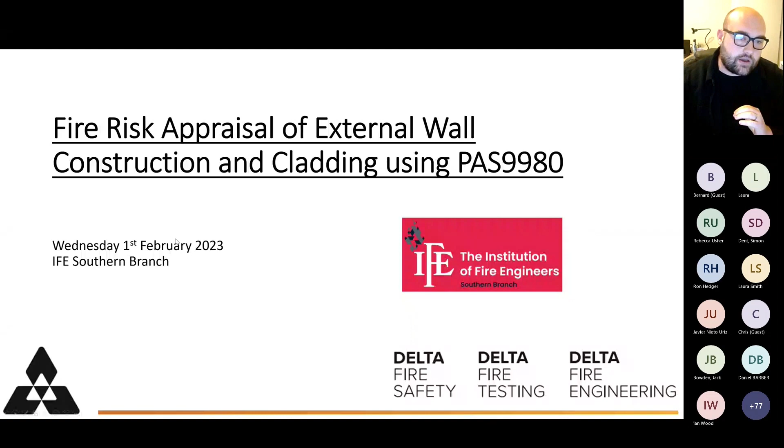I'll briefly introduce who I am. I was looking at some of the names coming in, lots of us know each other, but for anyone that doesn't, my name is Joe. So I wear two hats. I'm lecturer in fire engineering at the University of Central Lancashire. I specialise in delivering all of the technical modules related to industry. And I saw there's lots of students dialed in, so good to see you guys. Outside of that, I'm also director of Delta Fire Engineering and our trio of companies: Delta Fire Engineering, Delta Fire Safety and Delta Fire Testing. I run those three firms. So very busy. I do lots of lecturing, lots of engagement like this, and I'm also a practicing engineer. So everything that I teach, I am practicing what I preach.

I work out in industry, working on external walls quite a lot at the moment through our fire safety and fire testing parts of the business.

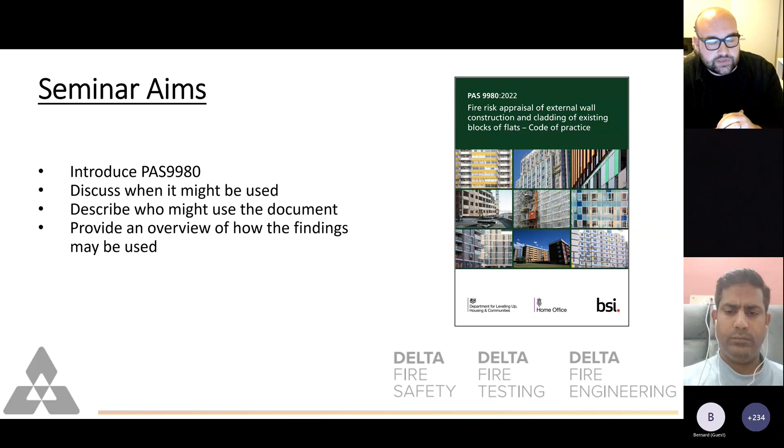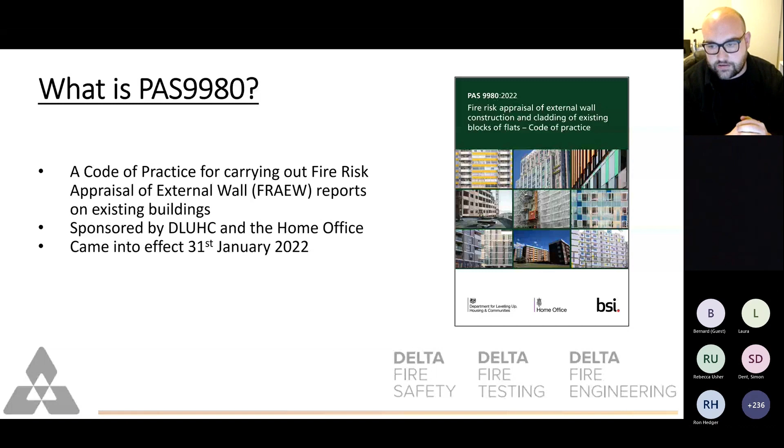So I'll start by answering the question, what is PAS9980? The document, as we see on screen there, is free to obtain from the British Standards Institute. You've got to put an email in, but you get a free copy. It's a code of practice, and it gives a methodology to undertake what we call an FRAEW, a fire risk appraisal of external walls, and it applies only to existing buildings. I'll go on to talk about why that is. It is quite a comprehensive document, a couple hundred pages. I took the opportunity to read it cover to cover in putting this presentation together, which I usually do. My presentation before was the post-war building studies, and I read all 500 pages, so this one wasn't quite as intense. There's loads of good information in there about the background and then a methodology to follow.

It was sponsored by the Department for Levelling Up, Housing and Communities and the Home Office, and it came into effect on the 31st of January last year. So happy birthday, PAS9980, for yesterday. We've been using it in industry for about a year. Of course, it was out for draft for comment just before that, but a year of it being really stress tested out there in industry for us guys using it.

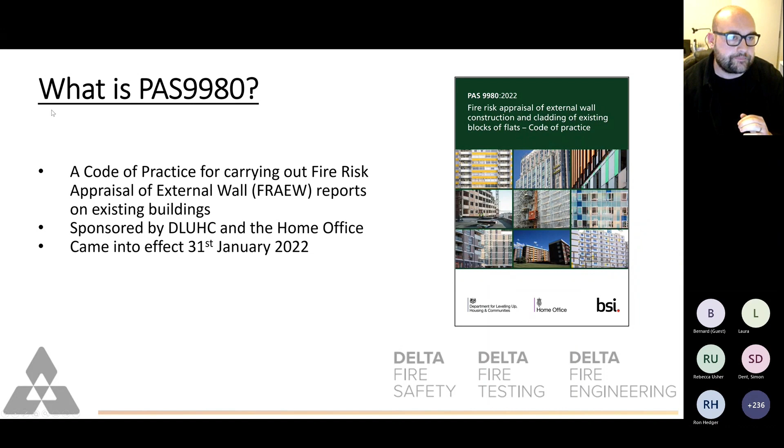In going through it, I was trying to write a section about the background, and I couldn't do a better job than the introduction in the document itself. This is section 0.1 of PAS9980, and it sets the precedent for why it exists as a document, and I think it does it rather well. Whenever I quote something from someone else's work, I put it in italics, and I put in bold the point that I think is most pertinent to what we're talking about.

Whenever we're talking about external walls, we all know in the back of our minds we are in the shadow of the Grenfell Tower fire, and that's where this document comes from. In the background, it alludes to this, talking about the loss of life at Grenfell Tower and the prevalence of external wall work that's come off the back of that.

The loss of 72 lives in the tragic fire at Grenfell Tower in June 2017 brought the risk of fire spread over external walls into sharp focus. I'm going to skip to the bit I put in bold: it is now known how this fire, which was unprecedented in the UK, occurred and gave rise to such a tragic outcome. Much is being done to make sure that such an event never happens again. That's the precedent behind us doing work on external walls, particularly when we're looking at existing buildings.

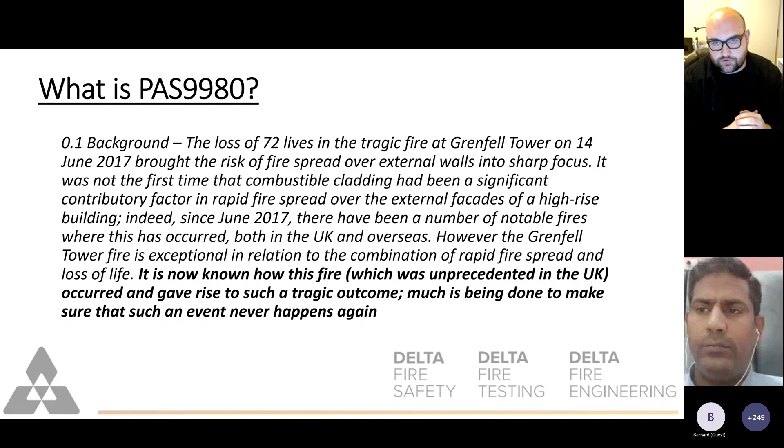And that's a really important point. Where we have existing buildings with potential fire safety issues, particularly related to the external wall, we look for methodologies like this so we can carry out risk-based assessments. I thought it captured it rather well, where it said much is being done to make sure such an event never happens again. Certainly when I'm working and teaching, that's what drives me on when we're doing this work, and I think lots of my colleagues share that feeling. So it's on this basis that we look into these methodologies for external wall remediations or assessments.

Any of you that have been in a lecture with me before, some of my current and former students will know I always try to tell a bit of a story and get in some relevance to what we're going to talk about. I want to do that by talking about external walls more generally and the complexities involved. When we write fire strategies and look at solutions - compartmentation, means of escape, firefighting intervention - we're thinking internal to the building, about the complexities of those individual elements.

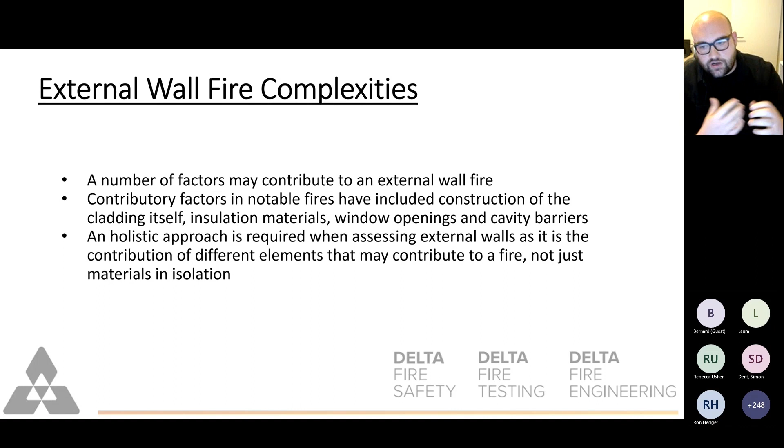When we look at external wall design for buildings, particularly high rise or where we've got residential occupants, there are a number of factors that can come into that external wall fire. It's not simply a case of one material in that external wall, or just the orientation of one element. We need a holistic approach - we need to think about all the components of that external wall and how they might behave together in the event of a fire.

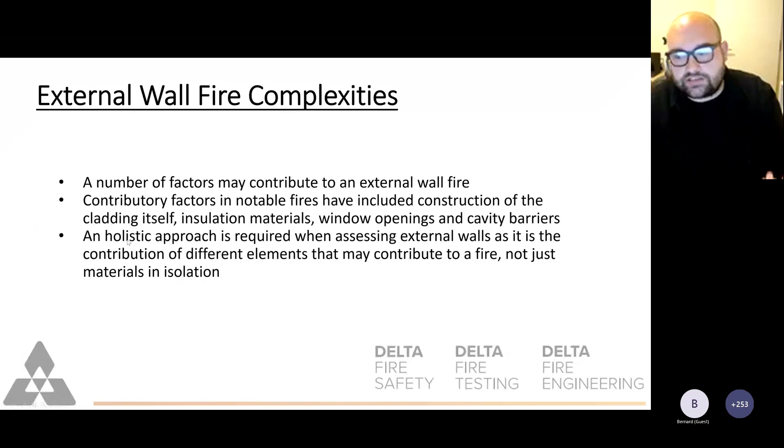When we look at notable fires - and this is a slightly longer presentation, I've taken out some slides because I'm limited on time this evening - we can look at case studies and some of the contributory factors. It's not always just one element that fails; it's not just the cladding or the insulation. It can be window openings, cavity barriers, the specification of materials and the way they're installed. There are an awful lot of complexities to do with external walls, which is why the key word here is the holistic approach. We have to look at lots of different things and adopt quite a lot of principles in carrying out these assessments.

We expect there may be some spread to the compartment directly above, but what we look to design out, and investigate when it occurs, is a fire that's able to either self-propagate or cause secondary ignition further up or more laterally from the compartment of fire origin, and crucially, spread back into the building in other compartments. If we go to all the effort of having an internal compartmentation strategy, like we do in flats, with 60-minute compartmentation between apartments, fire doors, 30 minutes, all these provisions internally, it can be detrimental to that strategy if we have external fire spread.

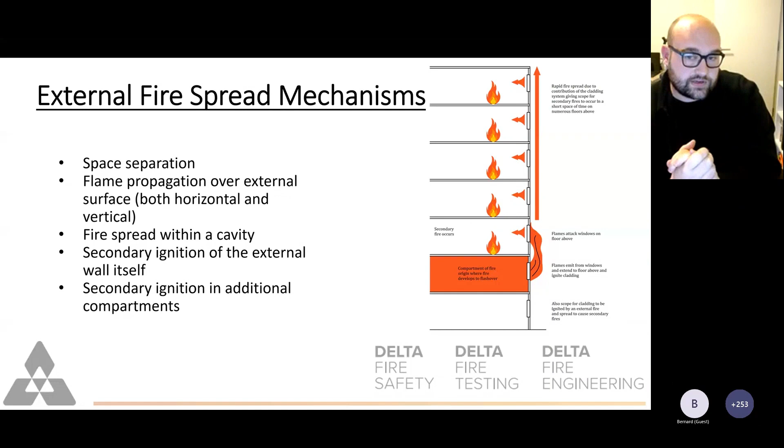This is a kind of entry-level fire dynamics. I do actually teach these slides on the course, on the degree. This is final year undergraduate. I usually at the beginning say where it sits, so it's about level 6, final year undergrad. Some of you guys have had these slides recently.

So let's look at the legal requirements. So what are our actual requirements? And this leads us to where we might adopt this methodology in PAS9980 on a real project.

So the Building Amendment Regulations 2018, we recall coming in post-Grenfell, and it imposed requirements on buildings that were designed and built thereafter. It limited the combustible nature of materials used in external walls.

In 2005, though, of course, we have our Regulatory Reform Fire Safety Order. So under the Fire Safety Order, we have a requirement under Article 9 to carry out a fire risk assessment of premises. And that was amended in 2021.

So the Fire Safety Act brings in, or confirms, that Article 9 applies to structure, external wall and flat entrance doors. Where traditionally - well, tradition is definitely the wrong word, it's not tradition, but where historically people may not have considered parts of the building under a high-rise residential, or even just a residential, fire risk assessment, in 2021 we get this legal obligation.

It's confirming that Article 9 applies to cladding. So we have a legal requirement to look at the cladding on the outside of a building, even if it's not cladding, just the external wall itself, when we're carrying out a fire risk assessment under the Regulatory Reform Fire Safety Order. And just to bring the presentation up to date, of course, we now have the Fire Safety England regs that came in just last week, in fact, wasn't it?

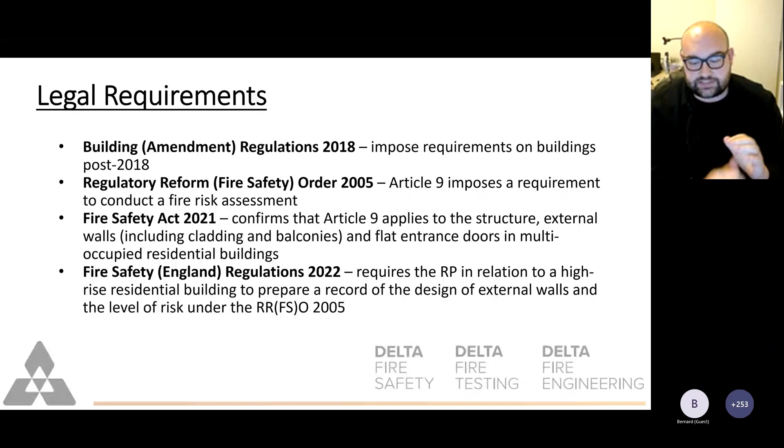So it leads us to this idea. So how do we go about doing that? In a normal fire risk assessment, if I was doing one of a residential premises, I'd be looking at PAS 79 and I'd be looking at some of the guides, the Home Office guides, and drawing on some knowledge I've got of residential buildings. But within those things, there isn't necessarily guidance surrounding external walls. So we look for a specific process, a methodology we can use.

And that is the FRAEW, the Fire Risk Appraisal of External Walls. PAS9980 was brought in to provide a methodology on which to do that. So it provides a methodology to do the risk-based review of the external walls. And perhaps that should be in bold, risk-based, because it is a risk-based approach, as is a risk assessment. It doesn't give an absolute level of safety. It's not a yes or no.

It's not an absolute prediction of the way that fire may occur and grow or spread. It's a risk-based approach, so it can be used by specialists to meet the legal duty to risk assess the external walls, which we just discussed in the previous slide, now a duty under Article 9 of the Fire Safety Order. This is a direct quote, and I very much agree with it.

No code of practice can ever provide guidance for all possible circumstances. There is a reliance in using any code of practice on the person that's applying it. It won't give all the answers in there, and it won't cater for all different scenarios. As we've said previously, external walls particularly are very complex things. There's not just the specification of materials, but the way in which they're installed, and the way different areas of external walls deteriorate at different rates over time, and how that may impact the fire performance.

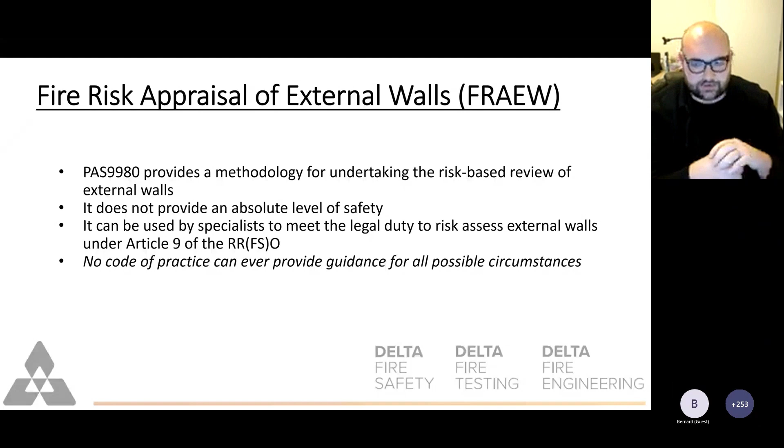I put it in bold just because I really agree with that statement, that it's not an absolute methodology you can follow start to finish and get an answer. There is quite a lot of reliance on the person that's doing it, and we go on to discuss competence in a couple of slides' time.

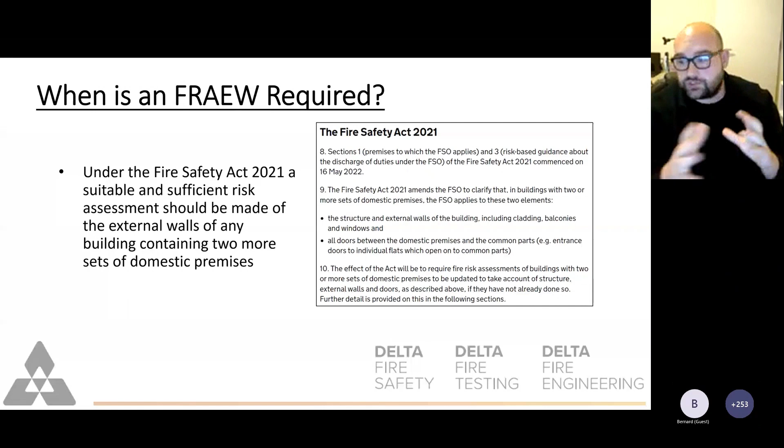This is just a snippet from the Fire Safety Act that tells us a suitable and sufficient risk assessment should be made of the external walls of any building containing two or more sets of domestic premises. Just for reference, that one I've already discussed.

It is a pertinent point though, because the question I often get is, when is one of these assessments required? I sometimes like to look at the question differently and ask, when is it not required? Let's try to define a time at which point we don't need to do it. So we know if we're carrying out a fire risk assessment, we have to consider the external walls.

If we look at that external wall and it is self-evident to the fire risk assessor that there is either no combustible material, or for some other reason that dictates the risk is sufficient, it feeds into the wider building fire risk assessment, that a more detailed analysis is not required. So, for example, if the external wall can be readily confirmed as being a traditional masonry construction...

I just start getting a lot of feedback. Is somebody on there? Can someone just mute their microphone? That sounds better, actually. Thank you.

So if the assessor can determine that the external wall is built of traditional masonry construction, there's nothing combustible present. If the age of the building -- these come from PAS9980 -- predates the mid-1960s, before the prevalence of combustible material on outside exterior walls and cladding systems, and there have been no amendments made, the assessor may make that assessment. This individual may say we don't feel there's a requirement for a more specialist, more advanced risk assessment technique of the external wall.

If it can be confirmed that there are no combustible components, if there's an O&M manual, there's been an assessment, there's been a previous fire engineered strategy undertaken reviewing the external walls -- for example, a competent person has looked at relevant test data and assessment as part of remediation or as part of a retrospective fire strategy -- then there's a case to say there's no need to carry out a dedicated, specific fire risk appraisal of the external wall.

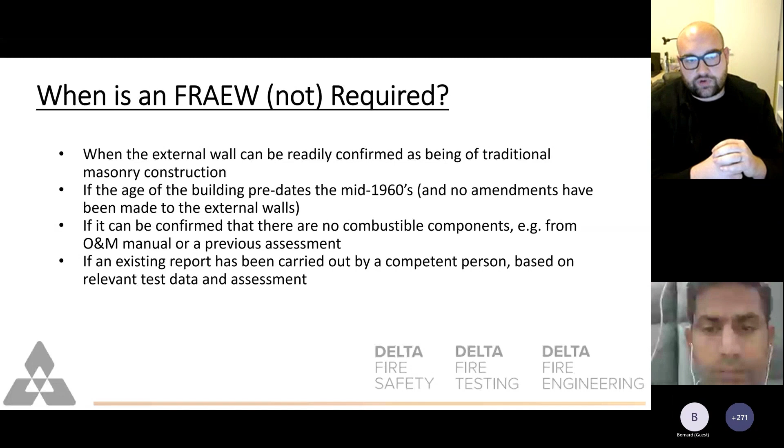Under the duties of Article 9 of the Regulatory Reform Fire Safety Order, that individual may say the risk is sufficient, it doesn't impose undue risk on the building, and that finding can just be included in the communal residential fire risk assessment.

Again, in italics, we know this is a quote from PAS9980, and it's one that I'd like to highlight. It says it is therefore expected that fire risk assessors will be judicious in their recommendations for an FRAEW by a specialist within the action plan of an FRA. Unnecessary recommendations from fire risk assessors would make significant demand on the scarce resources available, thereby diverting attention from buildings in which the public might be at serious risk, etc.

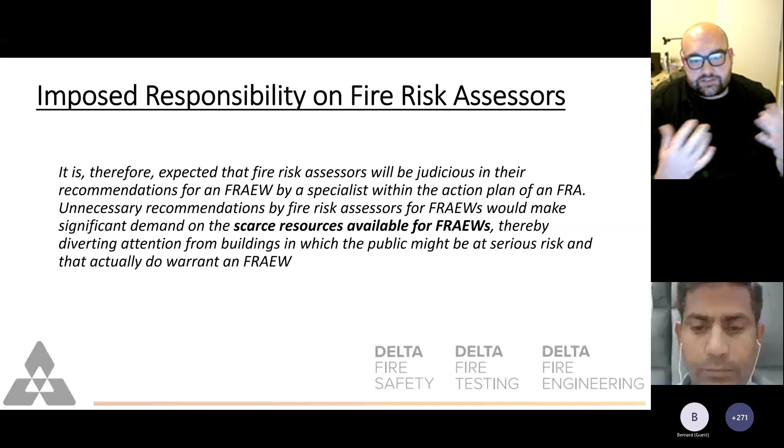I've put a bit in bold there because we're going to come on to talk about scarce resources available. There is a very specific reason that there are scarce resources available, and I present the fact that it's because it's very difficult work to do. It requires very specialist knowledge, and it brings us to the concept of competency, which is a very large section in PAS9980 -- something I spend a lot of time teaching.

So people who come and do the university course, the undergrad or postgrad, will at some point, if you haven't already, have a lecture from me about ethics, professional ethics and competencies, and being able to identify one's own limitations and what we're good at.

The undertaking of external wall fire risk appraisal requires a lot of specialist skills, because in doing that assessment you need knowledge of lots of different areas. So I've listed some of these out. These are some of the ones that I came up with.

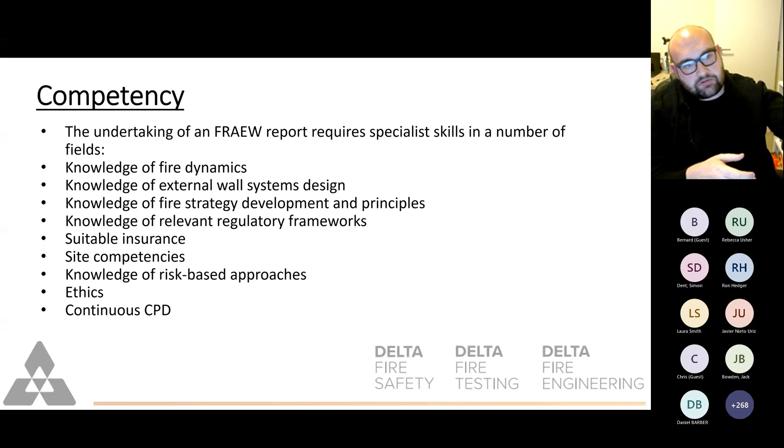Knowledge of fire dynamics. When we're looking at this particular assessment methodology, we have to make some predictions about how a fire might spread on the outside of a building, or what the contribution of materials might be. There's some technical stuff to look into about calorific values of materials, so there is some knowledge required of fire dynamics, but also knowledge of external wall systems design.

I think there has to be some specialization in how an external wall is specified, how the fire strategy is written, and also the construction methods. Being able to look at something on the outside of a building and identify the type of cladding that's there, thinking about what insulation is likely to be behind there, thinking about how it's been installed. That's a very important competency for people carrying out this work.

As is knowledge of fire strategies, fire strategy development and principles. A big part of doing these - and we'll come on to site-based works - we have to identify, we have to look for instances where we have cavity barriers. Without a bit of knowledge about fire strategies and thinking about where internal compartmentation would be, you can't target where to look for those areas, how to do your forensic investigation, your intrusive survey of the external wall.

So some knowledge of fire strategy, not just for external walls but also internal, is very important in doing this kind of work. As is knowledge of relevant regulatory frameworks. I did a very long lecture yesterday about fire safety law - I presume no one's turned up that was in that lecture yesterday, I think most of them have left the course because it was a very long lecture. But I've been looking at this quite a lot. How important is it that we understand in professional industry what the regulatory frameworks are? I think it's very important. I teach a whole module about law for that exact purpose.

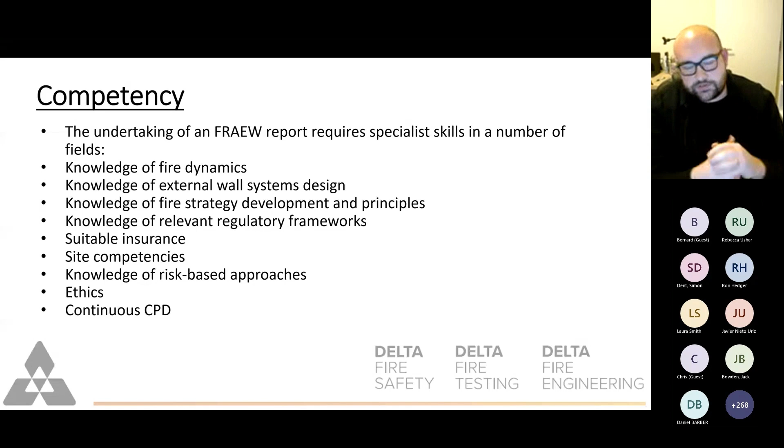We bang the drum continuously at the IFE and through various channels, the university as well, that continuous CPD is important, keeping the CPD log and making sure that everybody's trying to keep at the forefront of what's going on. Continuous CPD like this is very important, particularly in a field where there's lots of research going on.

I can talk from UCLAN's perspective. We're doing an awful lot of research into external walls at the moment. I think my colleague Eleni is on the call. She sent me a very good email this morning about some upcoming research, some PhD students we've got. So lots of good stuff going on. In an industry that has lots of research going on, we all need to keep abreast of what that is.

We should be reading papers, attending conferences, attending CPDs as we're doing tonight. Back onto the competency thing, that's just a list of things that I feel are quite important for individuals working in this field. We can see that it's quite broad. It doesn't preclude disciplines outside fire engineering being involved.

I actually encourage it. I have colleagues that I work with who are architects, and we have people come and work in Delta when we're doing this sort of work who are facade engineers. I think that's very important. So it doesn't preclude people outside of fire engineering and risk assessment being involved, but it also doesn't infer that fire engineers are automatically qualified.

It's a specialist area. I was doing a careers talk last week to a bunch of students, and I was talking about how fire engineering itself isn't necessarily, it is a career, of course, it's a very good one, but it's not the career. There are specialisms within there.

I've spent the last 3 years doing loads of CFD. So that kind of became my specialism for a little while, because I teach that and lots of my research is CFD based. I've come over to this field a little bit and find myself specialising in it. So as a fire engineer, having completed a degree and got some qualifications and letters after your name, it doesn't necessarily mean that those persons are automatically qualified. It doesn't mean we have to be a fire engineer to do this work.

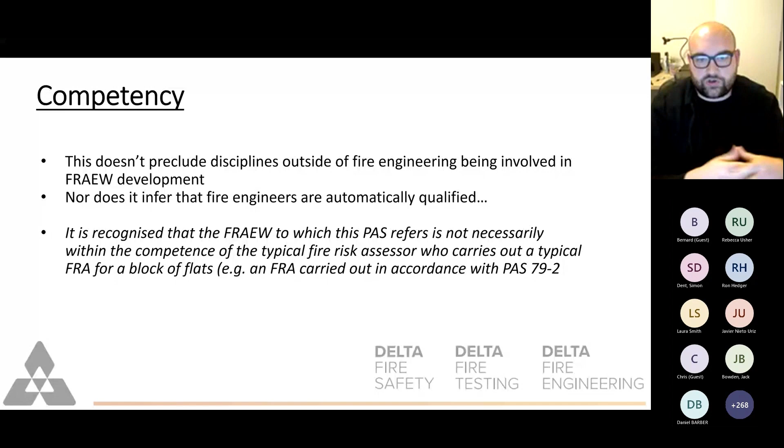It recommends a specialist come in and do this sort of work, or somebody that is upskilled sufficiently to be able to work in this arena. It is, in some cases, not always, but in some cases, a lot more technical than a fire risk assessment of a typical residential block of flats.

So an area just in PAS9980, I'll keep referring back and forth to the document, and we'll get to the methodology and things in just a second. But Annex H, I think, has quite a good section that describes this probably far better than I just have, about the expected skill sets of people involved in external wall assessment.

It breaks it down into 3 sections of roles, deliverables that we might have during one of these PAS9980 assessments, a fire risk appraisal of external wall. First of all, the information gathering. That could be the individuals going to site to look at the existing construction, or reviewing the fire strategy and the drawings and the test data.

It suggests for that individual they should be surveyors or building professionals such as an architect or facade engineer. PAS9980 has 2 different types of assessment, the basic level and the in-depth - we'll talk about those in a moment. For the basic level assessment, it recommends a fully qualified member of a relevant professional body, and for the in-depth technical fire engineering assessment, a chartered engineer.

When you look through Annex H, which I encourage people to do, it gives the typical professional recognition and the skill set as well. So the example on screen there for the information gathering and site survey: able to undertake document study, conduct on-site verification, has knowledge of materials, components and systems used in external wall construction. I certainly agree with all of those.

It gives the expected skill set for anybody involved in the different stages, because perhaps we've got different people doing different roles within this. We may get to a stage where we've got somebody out on site doing the information gathering. We've got a building surveyor. We've got somebody who's involved in architecture or facades.

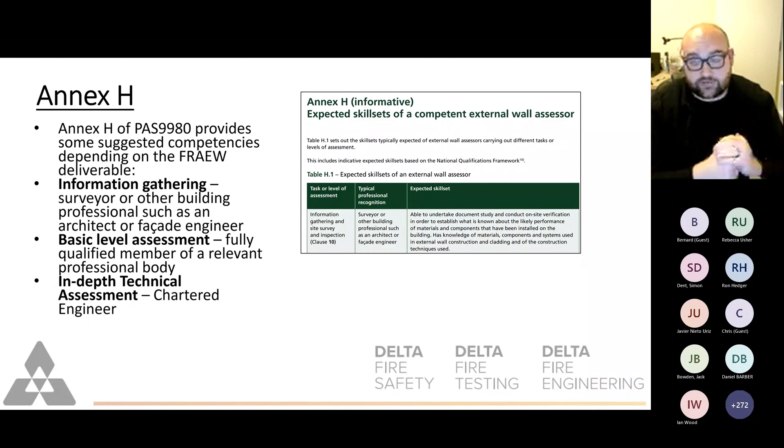That information goes to fire risk assessors or fire engineers to do the basic level assessment, and it's determined that more work is needed, so the in-depth work comes in - a specialist fire engineer that works only in this field. So at different stages in the assessment, we might have different people get involved who have a requirement for different skill sets, different competencies.

So the objective of PAS9980, then. We've kind of painted the picture there of why it is that we're looking at external walls specifically, on the basis of some issues that are involved in fires that have occurred and historic issues uncovered as part of that investigation. There is a requirement now, a legal requirement, to look at the external wall, do an appraisal of the external wall system as part of a fire risk assessment. It's been confirmed that that is a requirement of Article 9 of the Fire Safety Order.

And we know that it's very specialist. It's very difficult to do that. So PAS9980 was introduced as an opportunity, a way of giving a methodology to follow, to provide competent fire engineers. This should be in italics, actually, because it's a direct quote: competent fire engineers and other competent building professionals with a methodology for appraising and assessing the scope and risk from fire spread via external wall construction and cladding.

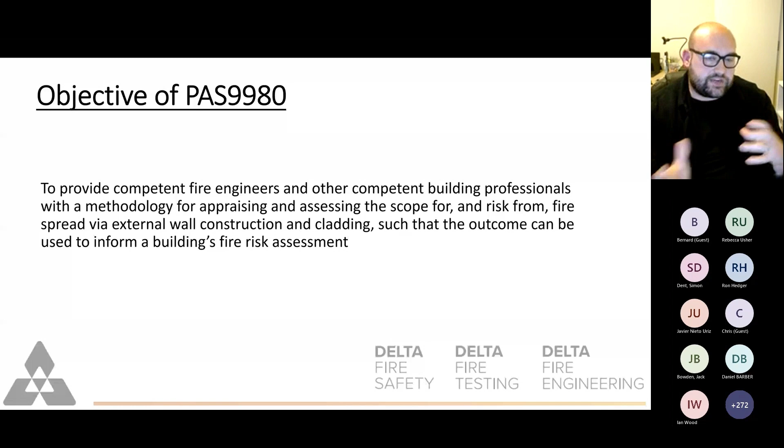And it's such that the outcome can be used to inform a building's fire risk assessment. Back to that idea of holistic. This will feed into the overall fire risk appraisal for the building that's occurring.

So a while ago, I wrote a paper called Does Size Really Matter? And it compared the risk in buildings of different heights. Don't let the terrible pun throw you off. It was a detailed piece of work, and it was talking about threshold heights in buildings. It's kicking around somewhere. Somebody sent it to me recently. It was published in a journal somewhere, I can't remember now. And in the paper, I discussed the idea that risk isn't necessarily directly proportionate to the height of the building.

I presented in there that if we consider the risk in a 2-story dementia care home, would we argue that the risk in a 3-story student residential is higher? And then we get into defining risk and talking about, if we consider the occupants, it's not necessarily just the height of the building. Now, of course, there are increased risks, consequences and severity and likelihood in a high-rise building, but it's not the only factor.

In actual fact, we can have really high-risk premises that are on the ground floor. We could have a ground floor hospital, and the risk to the occupants is greater than somebody who is on, arguably, it's the case I make in the paper, the 10th floor of a high-rise residential building that's sprinklered and has all sorts of things in place. So does size really matter? Well, not when we're adopting this methodology.

PAS9980 isn't one of these guidance documents that says it applies only above a certain threshold. It can be applied to a building of any height. It's very explicit in the introduction for that, because if we're doing a fire risk assessment, we could be looking at a building that has 2 or more dwellings. It could be 2-story, 3 stories, and we would still be obliged to carry out a review of the external wall system.

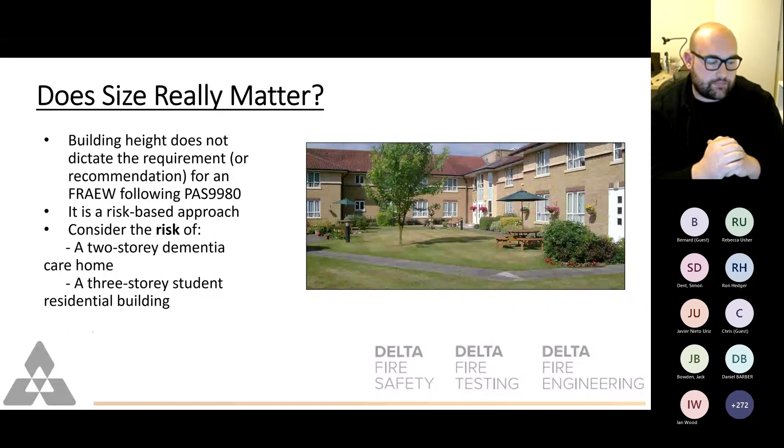So it's an important point to note, and something that people often say: I've never reviewed this document, Joe, because I don't work on high rise. I don't work above 18 meters, something like that. It's still a methodology that could be useful when we're just looking at fire risk appraisal of external walls of any height.

So another important point that I've got in bold there is that it's concerned with life safety only. And again, very explicit in the document, something that we should be aware of. If we are carrying out an appraisal of the external wall, and we are looking at using this methodology, carrying out any assessment, we are only looking at the life safety of the occupants.

It's not intended for property protection, much like if we follow the minimum requirements of the building regulations and we follow the minimum guidance of something like Approved Document B, we're designing for life safety only. That's really explicit in ADB and the building regulations. Any enhancement above that for property protection will further enhance the life safety, you could infer, but if we do the minimum assessment, we're only concerned with life safety, and quite right too. That should be our primary focus when we're looking at this. Go back to my very first slide.

The purpose of doing this work is to prevent a fire like the one we had in 2017 occurring again. So we are looking at the safety of the occupants of the building, not necessarily the structure and the insurer's requirements, for example. Again, the methodology can be applied to a building of any height. And the purpose, the intention of the PAS9980 assessment, is to inform the overall building fire risk assessment and to help make a decision on whether remediation or other mitigation measures are necessary.

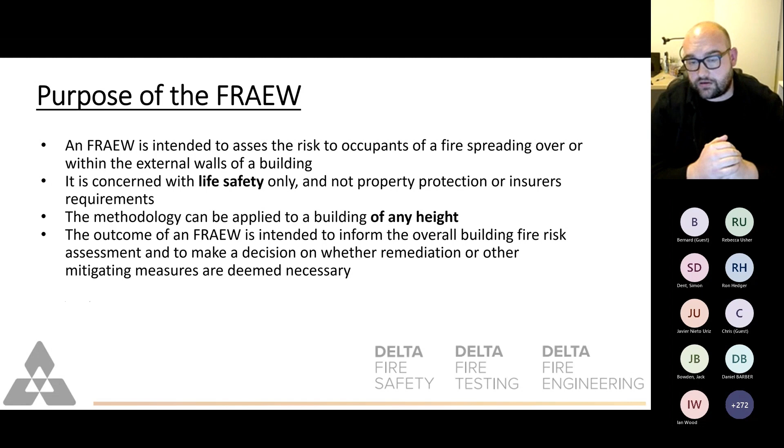If you Google PAS9980 and you get the automatic suggestions from Google, it gives the most searched questions. The most searched question is not how do you pronounce PAS9980, it's does it replace EWS1? And I've been asked this an awful lot. If I've got to be commercial for a moment, with a fee proposal out with the client for an EWS1 form, more times than I care to count, but certainly half a dozen, they phoned me and said, do we not need that anymore? Do we now need this instead? Is this a replacement? And the answer is no.

The EWS1 form is produced by RICS and is a valuation tool used for mortgage lenders. PAS9980 doesn't replace that in any way. Certainly doing EWS1 forms prior to PAS9980 coming out, there was always a requirement, or at least I see it as a requirement, that when signing off an EWS1 form, there should be some risk assessment behind it. There should be some way of justifying why that assessor has given it this rating, A1, B1, whatever it might be.

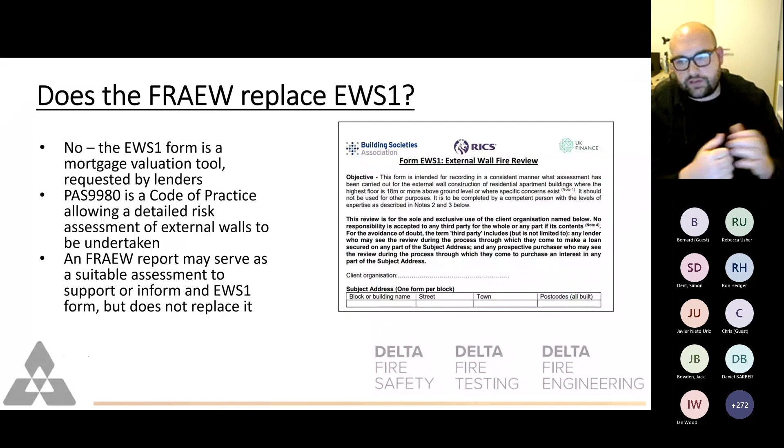PAS9980 can be used, it's an available methodology, should I say, in order to do that. So you can carry out a PAS9980 assessment, a fire risk appraisal of the external wall following the guidance of the PAS9980 Code of Practice. That can be the supplementary report that goes behind the EWS1 that justifies how we've made those decisions, but it's not a replacement. It's useful to get that one in because I get asked that question quite a lot. So it can support and inform the EWS1 form decision, but it doesn't replace it.

So to go on to the actual methodology, as I say, this isn't a session where we learn how to do the methodology start to finish. It's not a training session, but let's go through the methodology. As presented in PAS9980, it's a 5-step approach. The first thing to do is a very logical one: confirm that the full fire risk appraisal of the external wall is required. It could be that as we start to look at the documents, we realise there has been a previous full-scale test, BS 8414, and a BR135 assessment has been done. That'll lead us to say we don't need to go do intrusive works. We've had some work done previously.

Once we've confirmed that we want to do an appraisal of the external wall, it's then information gathering. When I do this kind of work, as with anything retrospective, I look to get as much information as I can. So I'm looking for drawings, as-built designs, the approval at the time, the fire strategy, previous fire risk assessment, any test data. If there has been a BR135 assessment, I'd be looking to review that. Having got that, we start to look into what we call factors, which we'll come on to in the next slide. We're thinking about how significant these factors are in altering the risk within the building. We consider each of those in step 4, and then we review that final risk factor. Steps 3, 4, and 5 is what I'll do next.

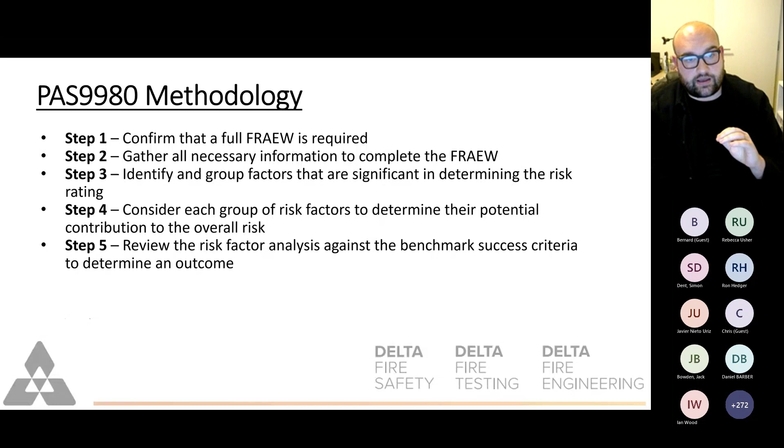But the thing to bear in mind is, first of all, we have a desktop exercise. We confirm that we're going to carry out a fire risk appraisal of the external wall, then we gather as much information as we can. We go through that and start to draw some conclusions. That will help inform the site works. As I mentioned earlier, cavity barriers: if we get a fire strategy for the building and we see it's cluster accommodation, and only 60 minutes is provided around a cluster, then we know we don't want to pull off a panel at the junction between 2 bedrooms that aren't fire rated, because we wouldn't anticipate a cavity barrier to be there. So from this, we start to form what we're going to do in stages 3, 4, and 5. So document review, I've just been through these by accident.

So building plans are obviously very important. Details of the external wall system, where these are available, specification. Fire strategy for the building, one of the first things that I pick up and read if it's available to me. Any technical literature from a manufacturer, it's always helpful to have. I look for that, hopefully, in an appendix to the fire strategy. I know certainly if I'm writing a fire strategy and I've got that technical data, I put it in as part of the information under the golden thread now.

Fire performance of any test results. So if there has been an 8414 test or even small bench scale tests of the components, I'd be reviewing those. And the laboratory report, any classification documentation as well that's available for the system on the building.

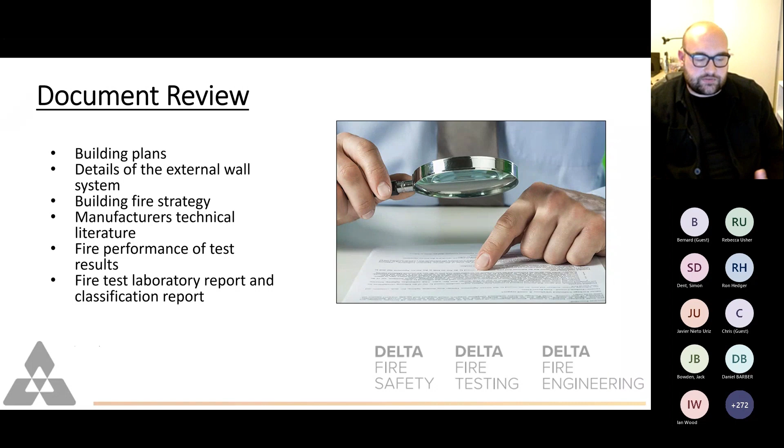We then have to go and carry out some form of site intrusive inspection. Now, the reason for this is quite pertinent. It's because a document that we review that says this is the intended design of the building is exactly what I've just said. It's intended construction. What we have to do is do some form of validation. So go to site and confirm that what has been designed has actually been installed.

I say this with caution, because I disproportionately see buildings that have issues with them. But in the vast majority of cases where I see something on plan, I go and it's not replicated on site. As I say, it's not my opinion that that's representative of every building out there. I disproportionately see a high number of buildings that have already identified issues, but it is fairly common. It's not a surprise sometimes to take a panel off and see a cavity barrier that's incorrectly fitted, or something that has been installed and has shifted over time and isn't currently aligned as it should be.

The fire strategy of the building, as I've said, the example actually was quite good. Cluster accommodation. What I mean by cluster accommodation for anyone who's lost is like a student residential, where you've got a self-contained flat, but the bedrooms themselves aren't fire rated, because that cluster would evacuate together, usually with a shared kitchen, shared living room, some form of facility within the flat. If we look at that and we say, let's take off something that's between 2 bedrooms, between the window, and we don't see a cavity barrier, we wouldn't expect that in that location, in that environment. So the fire strategy of the building might dictate areas that we're going to go and look at.

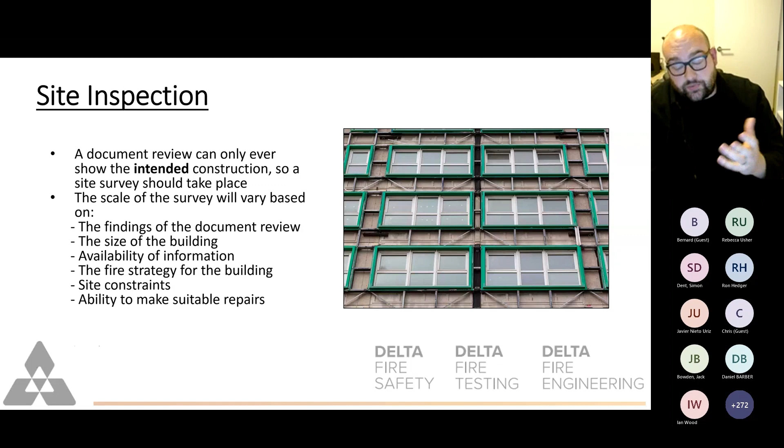And ability to make suitable repairs. I had a slide in here of some howlers where somebody has taken sections off, cut holes, and then made good with plywood and cardboard and all these things. So we're sensitive to the aesthetics of the building moving forward. We want to try and factor that into any site works that we do.

So having gone and done this, we've done a document review, looked at everything we can. Having then reviewed on site the information, which is further document review, we then carry out the risk assessment. The methodology proposed in PAS 9980 for carrying out a risk appraisal of external walls is to look at 3 different factors: the properties of the materials that are identified through that investigative research, the configuration of those materials, so how they're physically installed, the orientation and location and the scale of them, and the overall fire strategy as well.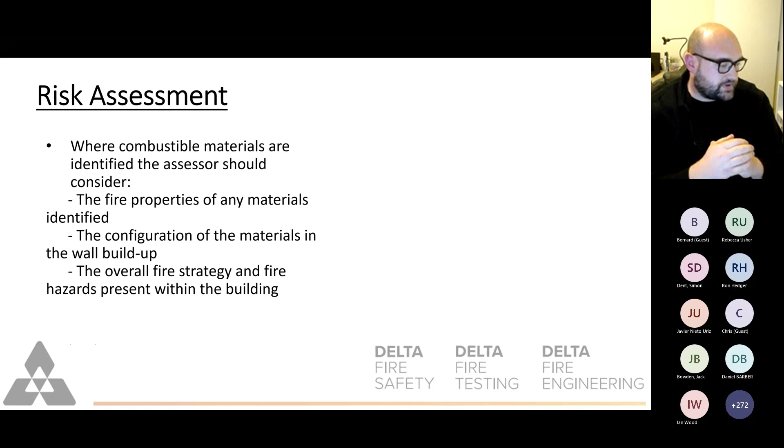So for these 3 things, there are methodologies in place to assess a number of factors of each. And for all the subcomponents of those 3 factors, there are positive, negative, and neutral consequences of each of those.

And this is the bulk of the actual assessment process of PAS9980. It is a qualitative assessment. If you follow the methodology and that basic approach, what you're actually doing is a risk assessment based off of this qualitative assessment.

For each of those 3 groups, we are assigning positive, negative, and neutral indicators to things that we've observed on site or found during our literature review. We then take the cumulative effect of all those indicators and consider whether the things we've observed have a positive, negative, or neutral impact on fire safety of that building.

So, for example, if we have a dominance of positive factors, lots of positive things in that building, it shifts us a little bit further towards the low risk part of the spectrum shown. But if we have a dominance of significant negative factors, lots of things that negatively impact the way the building has been constructed and designed, it will shift us to a higher risk.

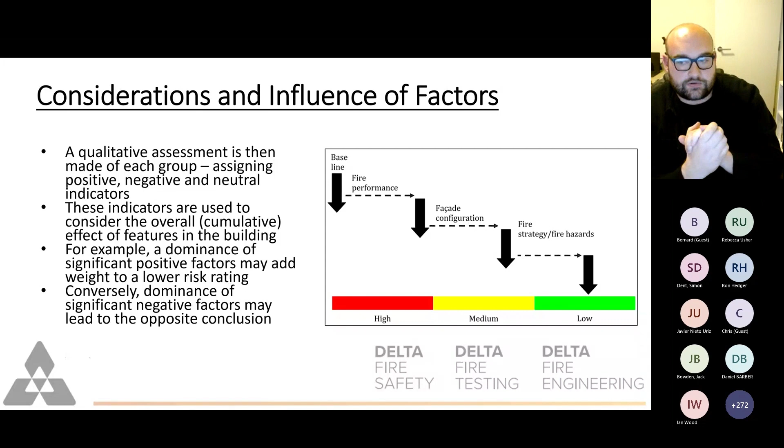And the third one, the fire strategy and the fire hazards - again, if we get a dominance of significant positive factors, we again go to the low category. And there are lots of these that are given in the annex, or 3 annexes, of PAS9980.

So just to go over the positive, negative, neutral things again, this is the way they're laid out. So we would say for a factor, for example compartmentation, is the design of compartmentation positive, negative, or neutral? Materials are the first thing that we consider - that's the materials used in the external wall or on the external wall of the building.

The examples given here: we have a positive impact if those materials are expected to limit the scope for rapid fire spread, but a negative impact if those materials would be expected to exacerbate or promote fire spread within the external wall. And neutral if those materials are just as we would expect them to be, if it meets the guidance, if there's no discernible positive or negative impact on the baseline.

So the example given here for materials, the materials used in an insulation product, for example - we would have a positive impact if the calorific value of the materials we've identified on site and investigated is less than 3 megajoules per kilogram. Conversely, if we identify materials on the outside of the building that have a calorific value greater than 35 megajoules per kilogram, we infer that has a negative impact on the building.

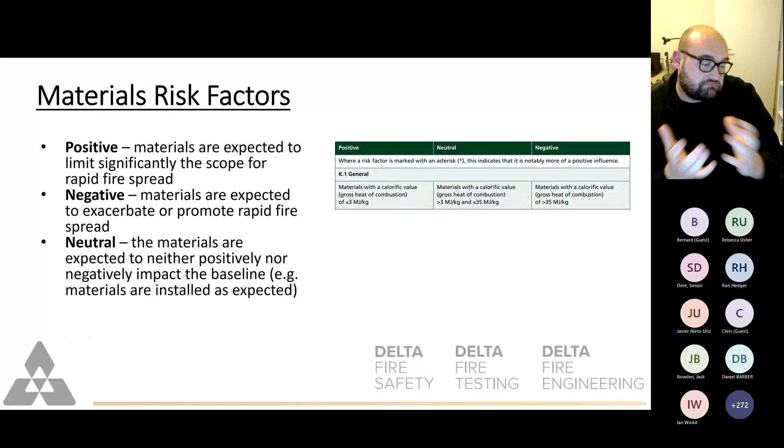So from our baseline, we've identified this high calorific value, so it's shifting us more towards the higher risk. It's not a quantified way, and there are lots of these that we look at just for the materials, but we're looking at what the overall cumulative effect is of the materials.

The second one is the configuration. So we're looking at the way that the materials on the outside of the building are installed. Again, positive, negative, neutral. Something we identify as positive would be materials that are expected to significantly limit the scope for secondary fires.

The example given here for positive is that if the height of the base of cladding is greater than 5 meters above street level, that's a positive indicator, because that tells us we're less likely to get a car fire or bin fire or some other fire on the external of the building, outside of our actual demise, spreading to a section of cladding on our building.

Whereas converse to that, if we would have materials that are less than 2 meters above the street level on the outside face of the building, that would be a negative indicator. It imposes a slightly higher likelihood that we would get external fire spreading on the outside face of the building. And if it's between 2 and 5 meters, that would be neutral under this methodology.

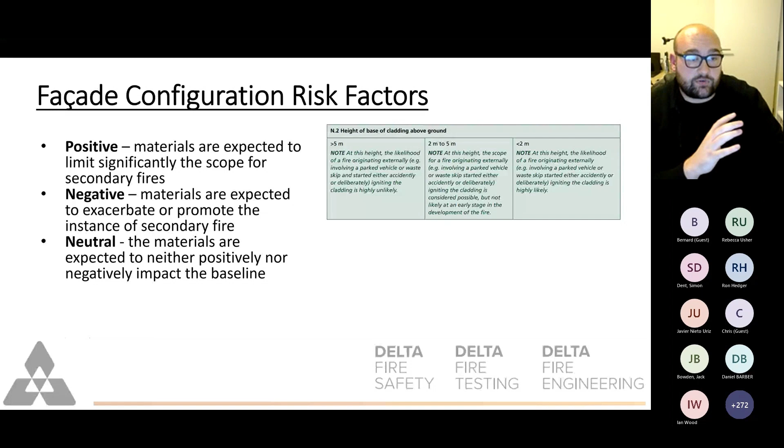It says the scope for fire originating externally and igniting the cladding is possible, but not likely at an early stage. So we're looking at these indicators. Again, it's not quantifying, it's not add one, take away two. It's just saying we've either got a positive or negative influence from that particular indicator.

And then the final one is the fire strategy, the kind of wider elements of the building. Again, going back to what I said at the start about us being interested in life safety here, we're interested in holistically looking at the impact of an external wall system on the safety of those within the building. So we have to consider wider elements like the fire strategy for the interior.

So we would have a positive factor if we had provisions that significantly increase occupant safety. It would be negative if we identified things that were missing or not installed correctly on the interior of the building, a fire strategy that has omissions or significant deviations from guidance that haven't been justified. And neutral would be it meets guidance, it's what we'd expect to see, neither positive nor negative.

I picked this example specifically because I particularly like it, to do with compartmentation. Let's use an example of a high-rise residential building. We would expect there to be compartmentation in that building. If it's a stay-put policy, we would expect 60 minutes between flats, protected entrance hallway maybe of 30 minutes. It's not strictly compartmentation there, but we would expect there to be fire-resisting construction within the building.

So if we identify that, that's not a positive impact. That's just neutral. We expect that to be there anyway. We can't use that as part of the mitigation to say the risk is reduced, because that's just an expectation that we have. The reason I picked this particularly is because I've generally seen throughout lots of projects things picked up from elsewhere.

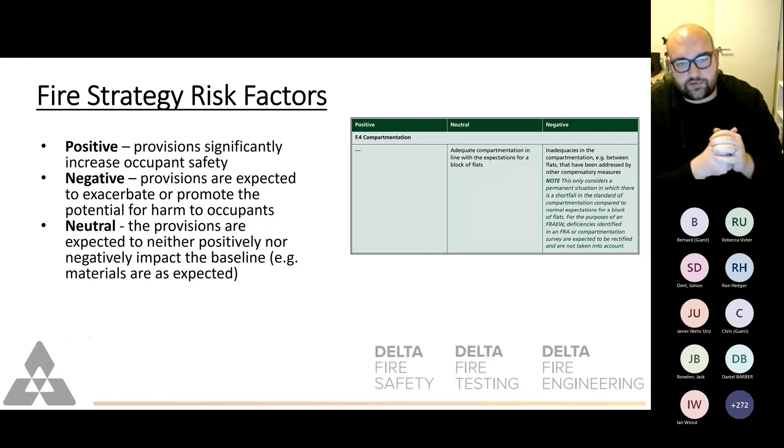Whereas if we identify inadequacies, this is a really big area. So we see penetrations that aren't adequately sealed, we see fire doors that aren't operational, self-closers that don't work, doors that are not fire rated - all those kind of things would be a negative indicator. Because if we get a fire on the external of the building and it spreads beyond the compartment of fire origin, we anticipate it could begin to affect communal means of escape and things like that. So again, negative indicator from a fire strategy perspective.

And the outcome of the assessment - I'm coming to the end of the presentation now. What we're looking for is, of all the things we've assessed as part of this assessment, what impact does that have on the overall fire safety from our baseline? So the baseline, again this is the example from PAS9980, saying we have a high fire risk inferred in this example, but the fire performance that we've identified, the performance of the materials, is substantially positive. So we shift slightly away from the bottom end of the spectrum there.

Again, the configuration of those things, like the example I gave, these materials are encapsulated. It would be unlikely we'd get a vertical line or lateral spread of continuous combustible material. It's shifted this example to medium. Everything inside the building, perhaps as enhancements - perhaps it's a mechanical system instead of a natural system that's been shown through CFD to be better performing than the ADB minimum, or we've got a sprinkler system where we don't otherwise need one - again has shifted it to low.

That's the purpose of doing the fire risk appraisal of the external walls. It's to feed into the overall risk profiling for the building, and potentially, if it goes the other way, to look at remediation - saying the risk is sufficiently high that we need to do works to this building. We need to remove sections of it, we need to maybe do things internally. I've seen recently on a job I was reviewing this week, additional heat detectors in rooms that open onto areas where we have combustible materials. It was a temporary measure, but that came off the back of a PAS9980 report done by another consultant. I think it was perfectly reasonable in that case - very, very good.

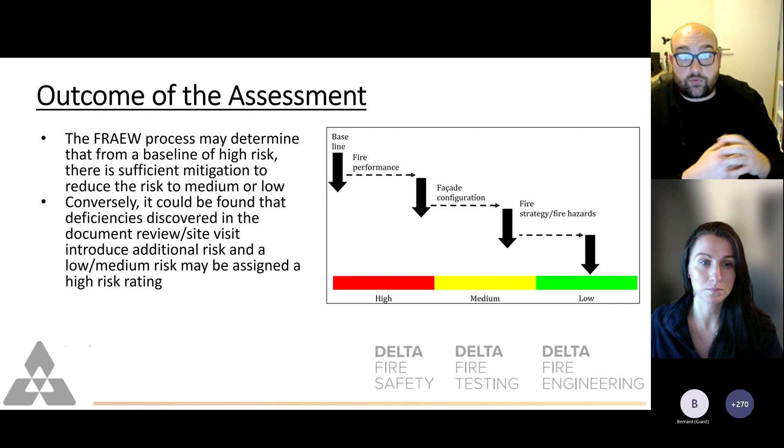So as it says there, conversely, it could be found that deficiencies in the document review actually mean we go up to a higher risk. So if it wasn't previously understood that the internal compartmentation was inadequate, we may actually, off the back of this assessment, find ourselves with a lower feeling of fire safety than when we first began the assessment.

Just to briefly touch on this - when we run this as a training course from time to time, and I teach at the university, we concentrate on this one. That is the basic assessment. It's identifying the three factors, looking at the influence of those, and assigning that to the overall building.

There is then the detailed fire engineering assessment. Annex G of PAS9980 presents a proposed methodology for that. In essence, if we've got a result where we still have high risk or medium risk, or there's still something not quite quantified and we want to investigate further, we can adopt fire engineering principles - we can start looking at other things, large scale testing. We can go out and do some bench scale tests and some CFD. That's a piece of work we're doing at the moment at UCLan. We can look at more advanced engineering methodologies.

So this is my only slide on this one, unfortunately, because I'm running very low on time. But there is a methodology to do that, and that's the next logical step, having done the basic assessment and identified high risk where we need remediation or mitigating measures in the short term.

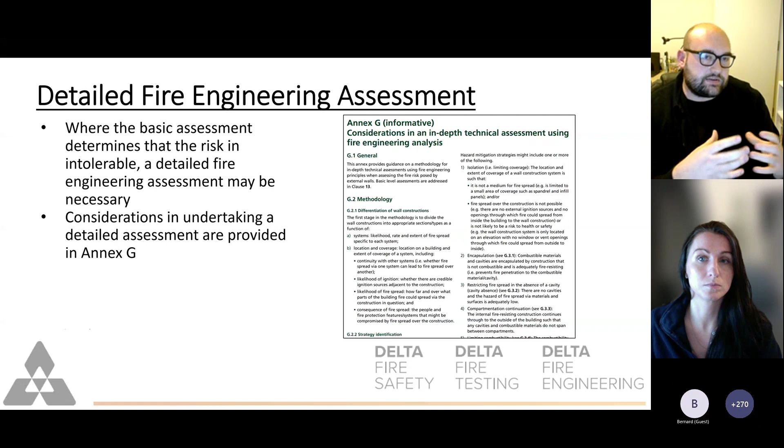First of all, a clear scope - explain what the document is, say what the scope of PAS9980 is, the scope of the fire risk appraisal of the external wall, what's trying to be achieved. The competencies of the assessor - I think it's useful to put that, particularly because as we've identified, there are stringent requirements and recommendations for people doing this sort of work. Description of the building, description of the wall system, the building fire strategy, and findings of the document review are all kind of lumped in together. In that section we're looking to justify the work we've done and how we've determined the conclusions we have.

The fire performance of the components - all the sections we have in the risk assessment, so the materials, the orientation of them, and the wider fire strategy - we have the risk assessment in there, what the impact might be on overall safety, and then of course any required actions. Any risk assessment we carry out, whether it's under Article 9 of the fire safety order, a risk assessment of the external wall, or RAMs for somebody climbing up a ladder - there should be some form of either proposed mitigation in there or some actions for people to carry out. So we again expect to see those in these reports.

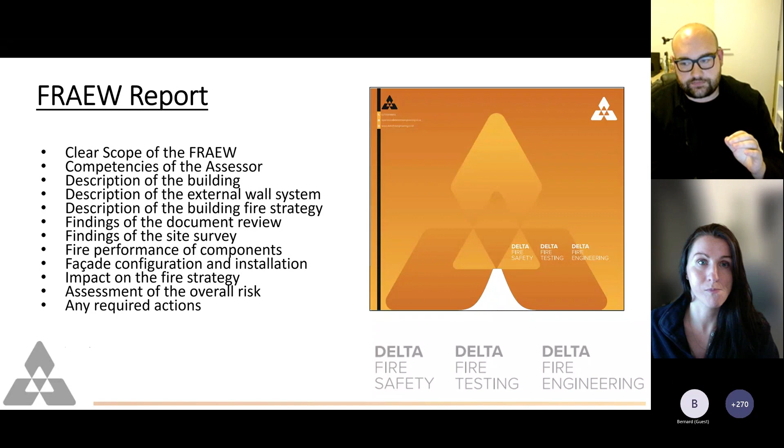There are some sections, as I say, I took the opportunity this week to reread PAS9980. I've not read it in full since it was draft, so actually going cover to cover was quite a good exercise for me. A couple of sections I think are particularly useful for anyone who wants to learn a little bit more, or thinks there's something in there they haven't quite understood before and wants to go into more detail.

Section 6 of the document provides a good overview of the legislative context, not just legislation as it stands now, but some of the history. Section 8, I think, is worth a read. It outlines the competence of external wall assessors. It's a very pertinent case put forward, and again, I agree with what's written in there. Good for anyone thinking about doing this work, or thinking they've received a document and want to see the competence of those doing it.

And then three annexes I just think are quite useful for anyone that wants to learn a bit more. Annex A gives a good description of relevant fire tests. I actually give that to my students when I teach European fire testing. I just think it's quite a concise discussion on the different tests and how they correlate to national tests and things. So keep that one, it's a good one to read.

Similarly, Annex L is quite a comprehensive description of wall types and materials. So I think it's a good one to be looking at for people going to site, and certainly early careers. It's a good one to just familiarise yourself, or myself, or whoever it is that's looking at this, with some of the wall types we might see.